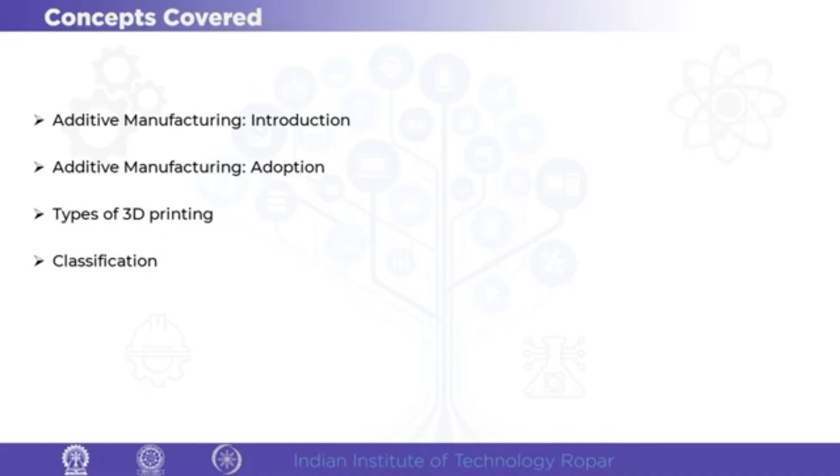Today we will be learning about additive manufacturing. Additive manufacturing is a new revolution in manufacturing, driven by cutting-edge technologies and breakthrough innovations. It is reimagining production processes, redefining sustainable manufacturing. Additive manufacturing is currently a market worth more than 2.2 billion worldwide.

There are a lot of machines currently being sold across the US and globally. In India also, a large number of machines are being sold by various companies. The data I have is from 2012. At that time, a lower cost machine sold for 35,000, and in the US especially, around 6,000 of the bigger machines were sold.

But now things have changed. Now with a 20.5% CAGR, the global additive manufacturing market is supposed to be worth 34,846 million by 2028.

So welcome to the world of additive manufacturing, which is transforming manufacturing processes in India and worldwide in a very big way. It is opening new pathways to economic, technical and logistic advantages in the manufacturing domain.

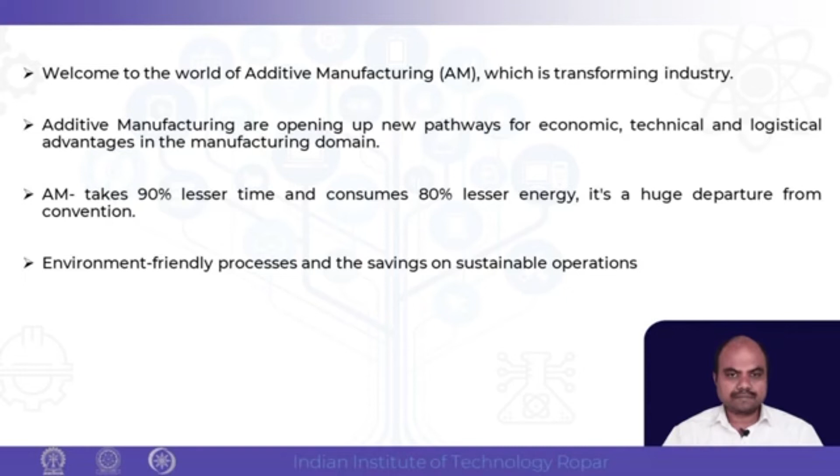While conventional subtractive manufacturing forms a 3D object by machining out material, additive manufacturing is popularly known as 3D printing. It makes layer by layer manufacturing and builds the product in minutes, and both smaller and bigger sized components can be made using additive manufacturing.

So very small, micro level printing is also possible, whereas even in civil systems, bigger projects using additive manufacturing are also possible.

So additive manufacturing, or rapid prototyping, or 3D printing, prints faster and significantly reduces time to market. Whenever you want to print something, you take it, make the CAD model, convert it to an STL file, and give it to the computer, which sends it to the 3D printing machine.

So the time from design to manufacturing is very less, and this speeds up the overall innovation. So for new technology, new products, if you design it, you don't have to wait a long time to realize it. Very fast, we can design and produce the part in less time.

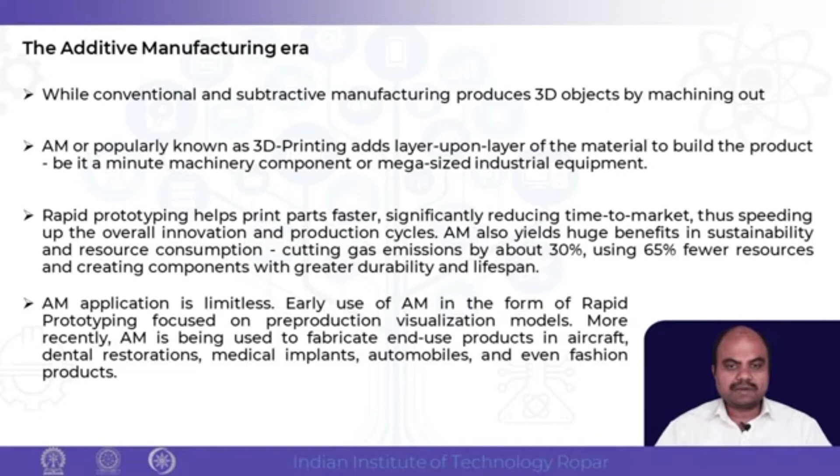So it's a huge benefit, and it's sustainable also - resource consumption is less, and carbon emissions are reduced. Applications are limitless. We can fabricate various models, and it has various applications in various industries.

Almost 34% of US manufacturers have already adopted additive manufacturing in their manufacturing plants and systems.

It is not required that we have to remove the traditional manufacturing process. Additive manufacturing process can replace some portions or some processes. However, it should actually be an addition to the manufacturing technologies and machines which a company already has, so the added advantage can be used for multiple applications.

So applications are diverse - from automobiles, energy, medicine, aerospace, so many applications. NASA has successfully used rocket injectors made this way, and in a Formula car, a 3D manufactured product has also been used. A wide range of materials can be covered, used for industrial and other applications.

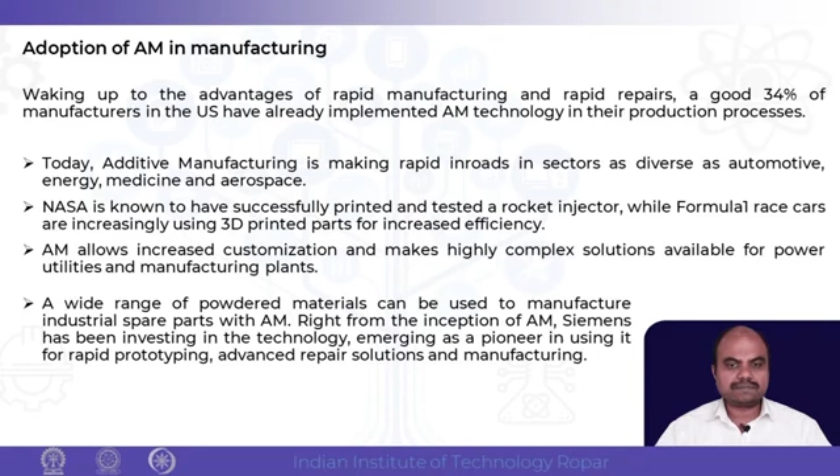So additive manufacturing is also known as 3D printing. It refers to a manufacturing process which creates 3D objects using multiple layers of material to form a component. There are various methods for additive manufacturing, and various materials can also be used like glass, plastic, ceramics, metals.

There are also other terms like 3D printing, rapid prototyping, direct digital manufacturing, layered manufacturing, and additive fabrication. All of them are similar kinds of terms used to depict the additive manufacturing setup processes.

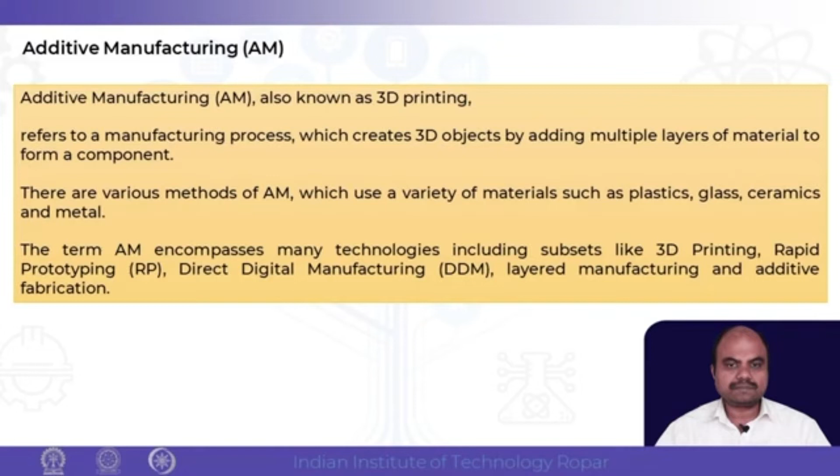As per standard, there are various additive manufacturing processes, but there are 7 major additive manufacturing processes which we are going to learn soon. The differences are in terms of building mechanisms, price point, materials, and usage. Some of them are quite different with respect to each other.

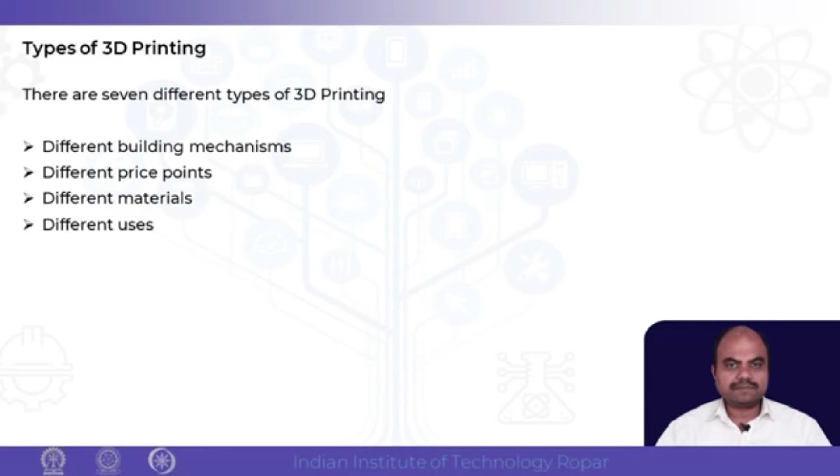So why is additive manufacturing used? It is used for prototyping, low volume manufacturing, and tooling. Tooling means previously, especially for plastic bottles or anything you want to make, dies were very expensive - you had to make 5-axis, 6-axis, 7-axis CNC milling machines to make a die, and it takes a lot of time also. Now, much of this tooling can be done with metal additive manufacturing process. Of course, post-processing is required, but that is much less time consuming compared to the total time required for manufacturing.

Consumer products can also be made. Customization is very much possible with additive manufacturing because previously we used to have one design made multiple times. Now with additive manufacturing, every time we print, you can customize it easily.

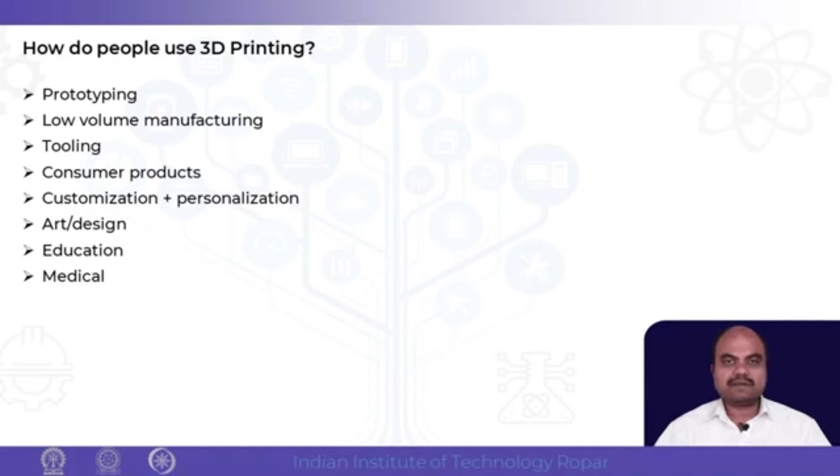Art production - AM can be used for art production also, and see how it looks. Design checking - you can make a prototype and check whether the design is okay or not, and the same prototype can also be analyzed. For education, AM is used. For medical, there are lots of applications, many places AM is used.

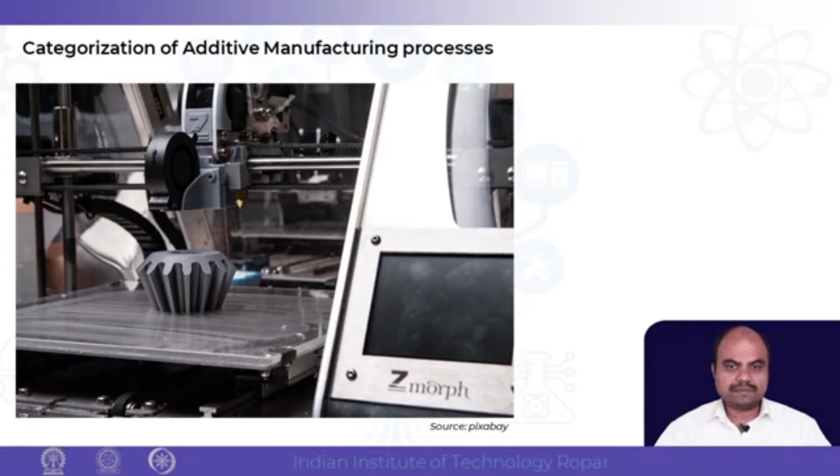Now, categorization of additive manufacturing process. Here you see one image of a metal additive manufacturing machine. As per ASTM F42, additive manufacturing is classified into 7 major categories. The difference among these is basically the material used, the deposition technique used in the machines, and the way the material is being fused or solidified.

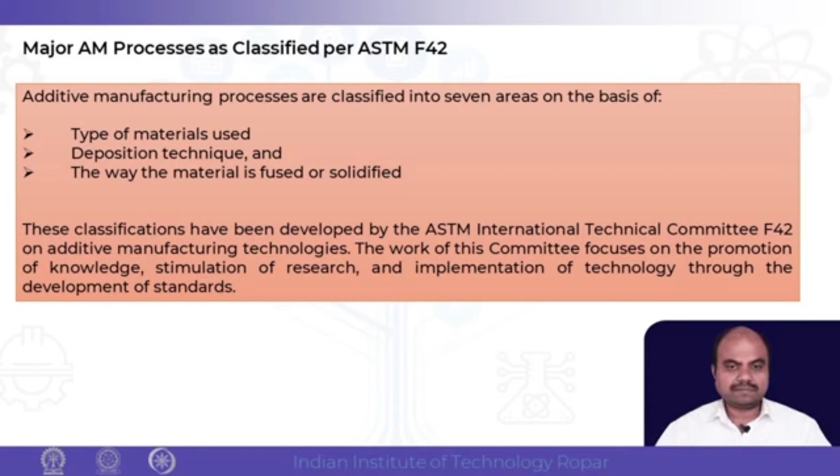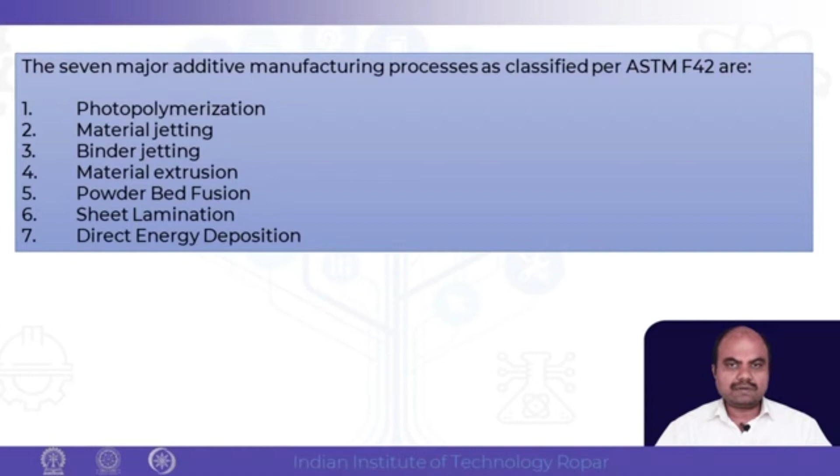So what are the 7 additive manufacturing processes according to ASTM F42? One is photopolymerization, second is material jetting, third is binder jetting, fourth is material extrusion, fifth is powder bed fusion, sixth is sheet lamination, seventh is direct energy deposition. Now we are going to learn more in depth - according to ASTM F42, there are 7 techniques, 7 processes basically.

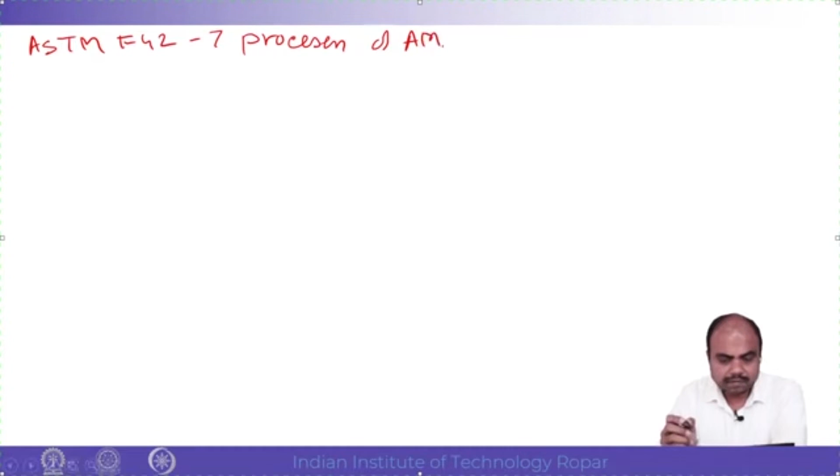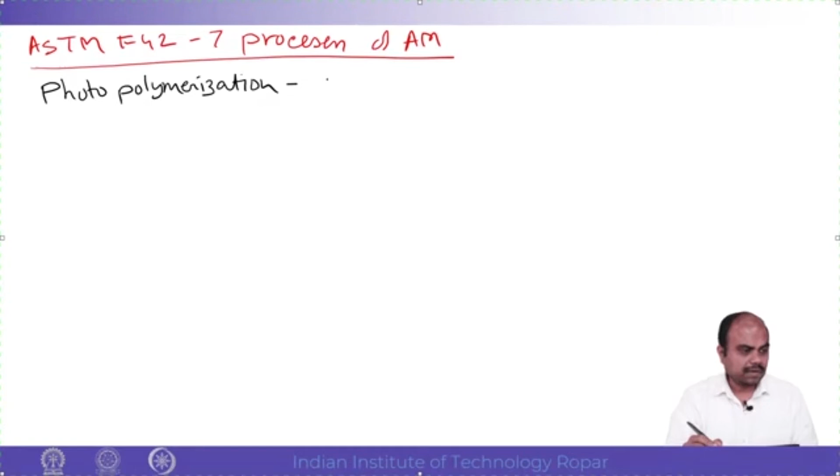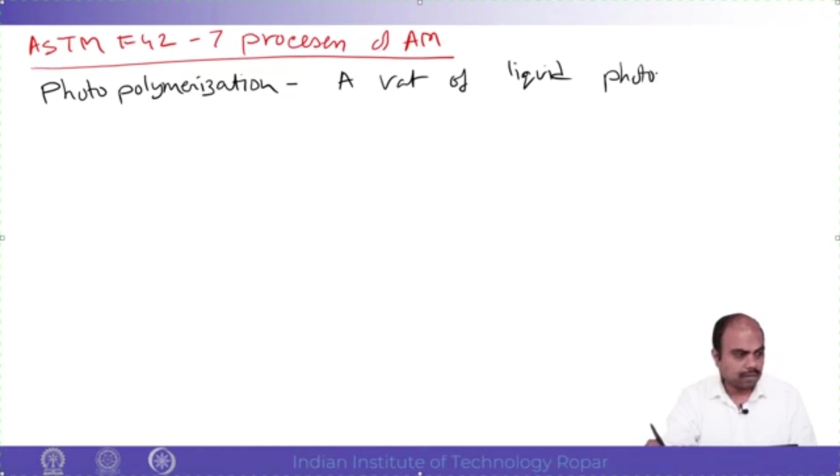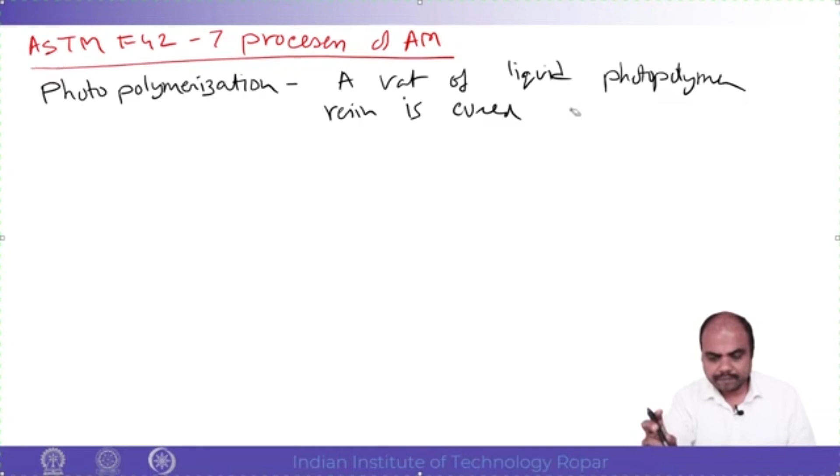Let me take a different color. One is photopolymerization. In this, basically a vat of liquid photopolymer resin is cured through selective exposure of light. Resin is cured selectively using light, laser, etc. The next one is material jetting.

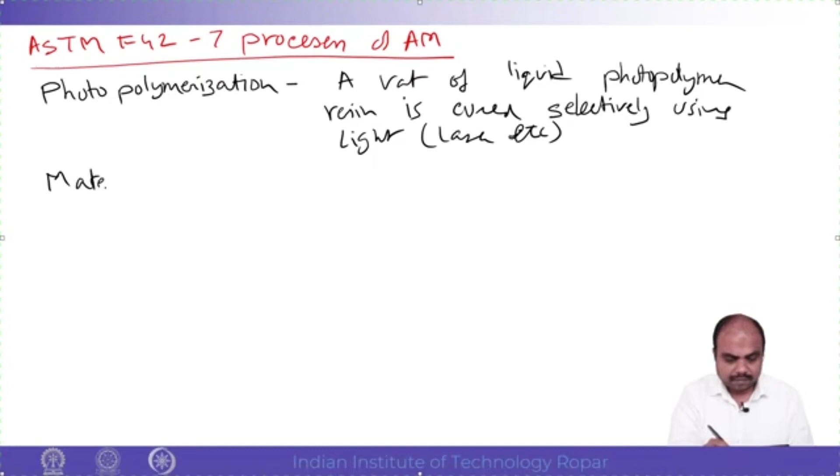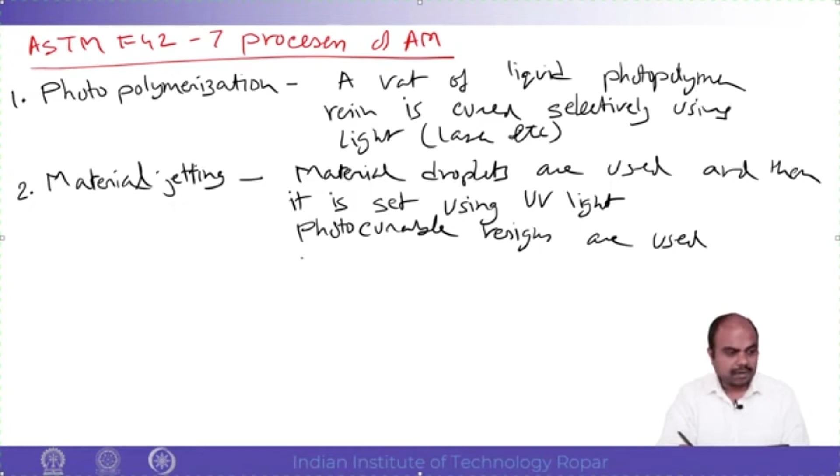Second one, material jetting - in this, material droplets are used, and then it is basically set using UV light. So here also photocurable resins are used. This was originally termed as 3D printing.

There are multiple names for this photopolymerization technique. Some of the names are stereolithography, SLA. It is also called digital light processing. These are very similar technologies, but they are not the same - they are a little different from each other. Then there's clip technology, that is continuous liquid interface production, which also falls under this system. Then scan, spin, and selective photo cure. These names exist because different companies are making technologies falling under the main photopolymerization technique, with different names and sometimes different technology. Like clip technology is much faster, a little less accurate, but very fast. So this falls under photopolymerization.

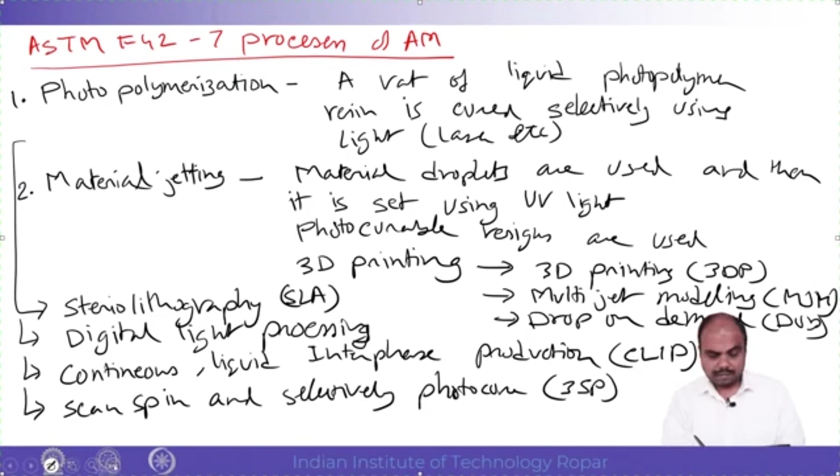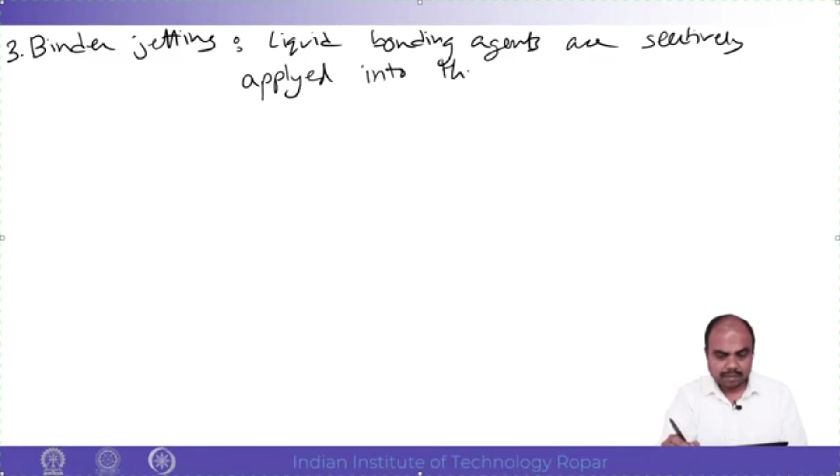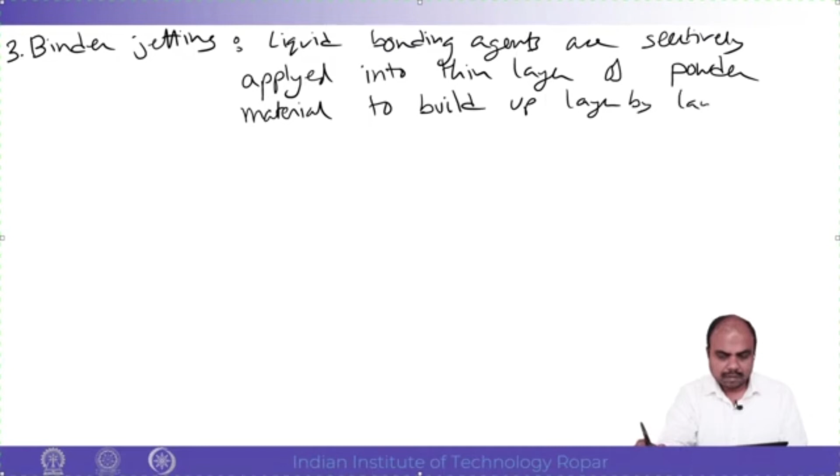Now we will go to the next technology, that is binder jetting - third one. In this, the technology is that liquid bonding agents are selectively applied on thin layers of powder material to build up layer by layer manufacturing. Here electricity is not used because it's not required.

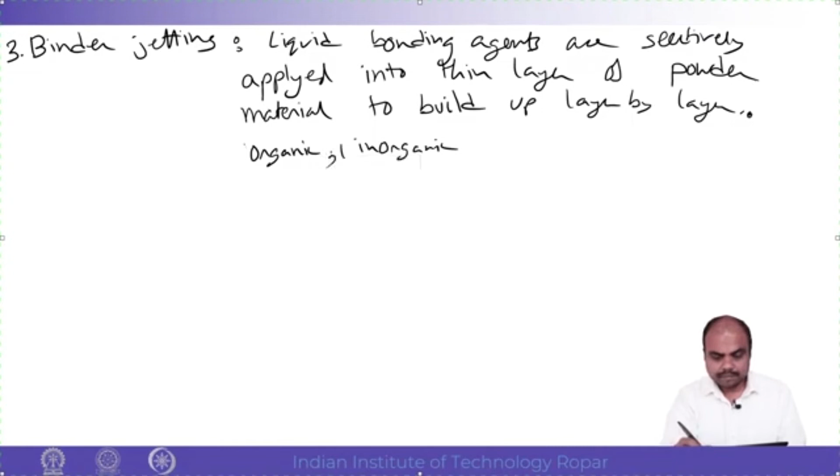In this one, materials can be organic, inorganic, it could be metal also - metal, ceramics, etc. The other names for this are drop on powder, DOP, and powder based printing.

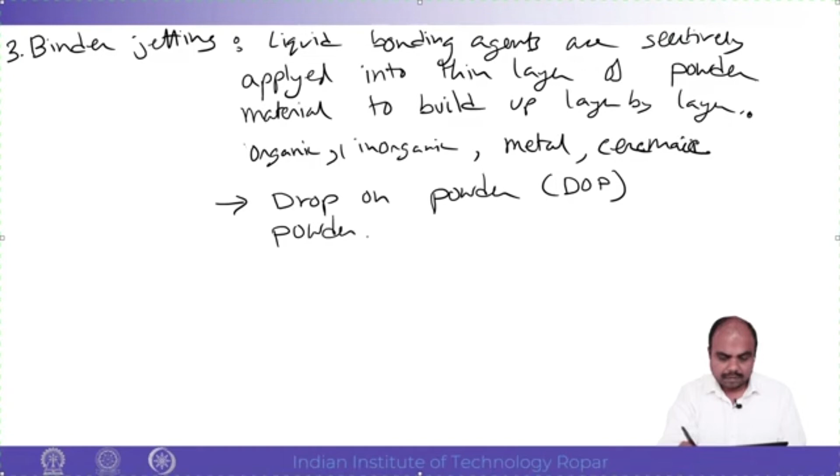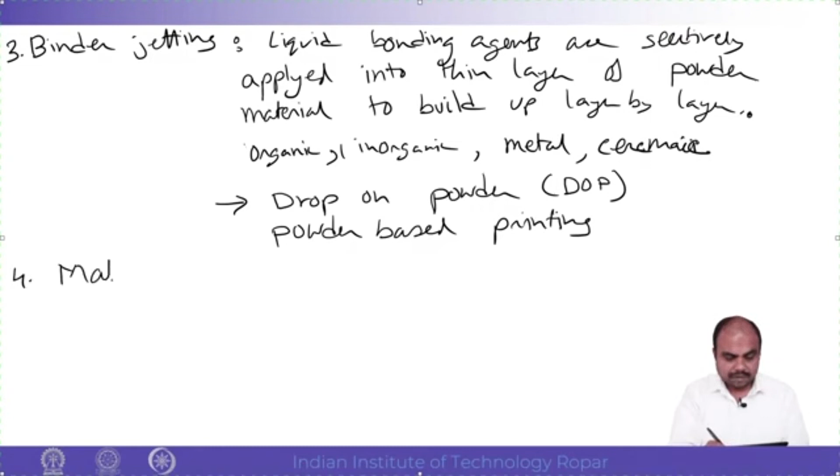The next one coming is material extrusion. In this, the material is extruded through a nozzle and it is made into multiple layers. Engineering thermoplastics are used.

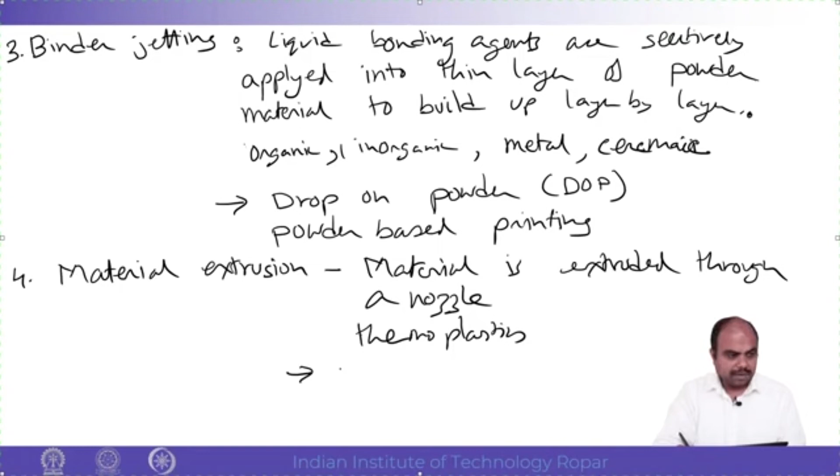This is one of the most widely used techniques, and FDM is one of the machines - various companies have made this machine and are selling it in the market at a very cheap price. The technologies coming under this are fused deposition modeling, FDM, and fused filament fabrication.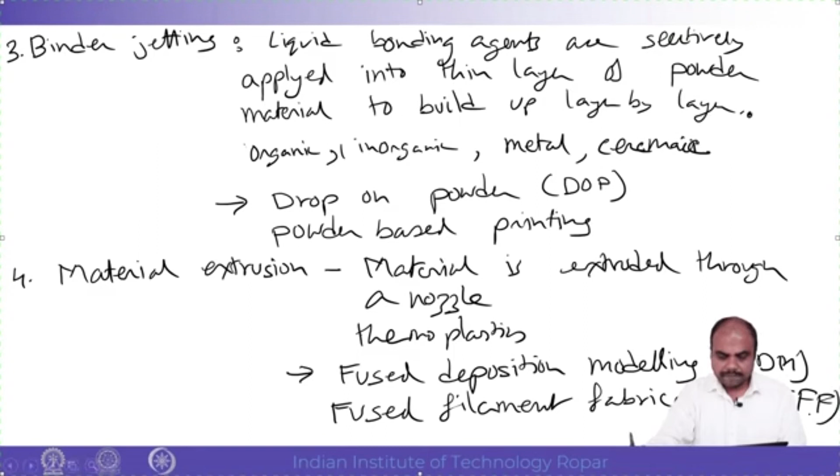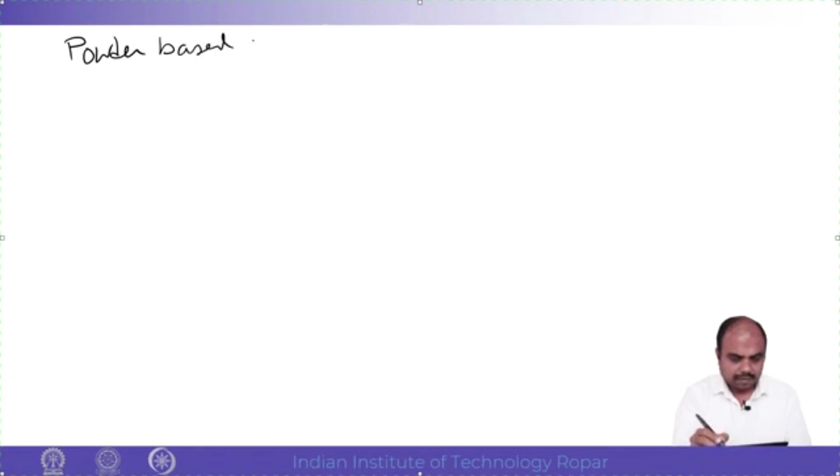The next one is powder based fusion - fifth one. In this, the technology is that powder material is selectively consolidated and melted together using a heat source such as laser.

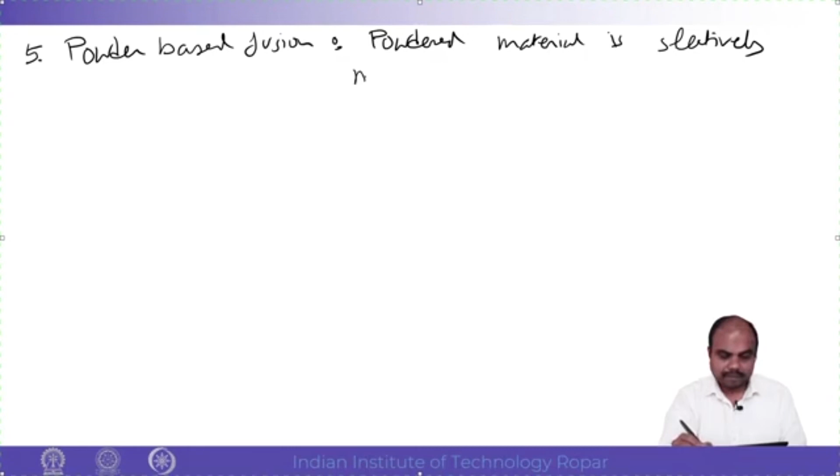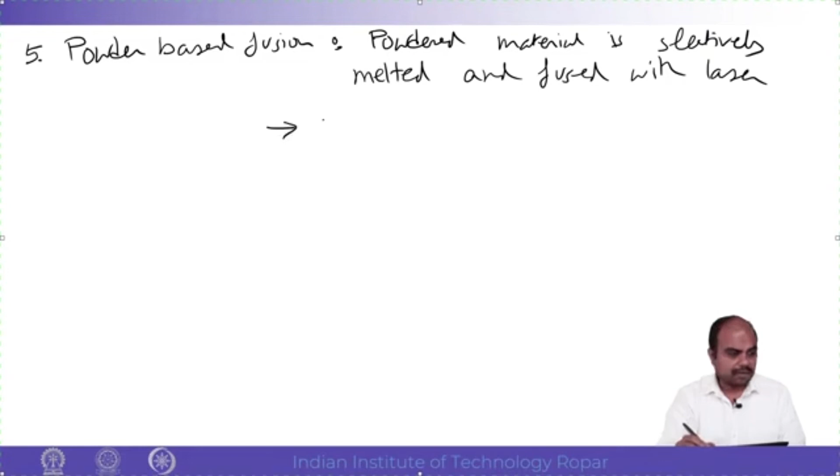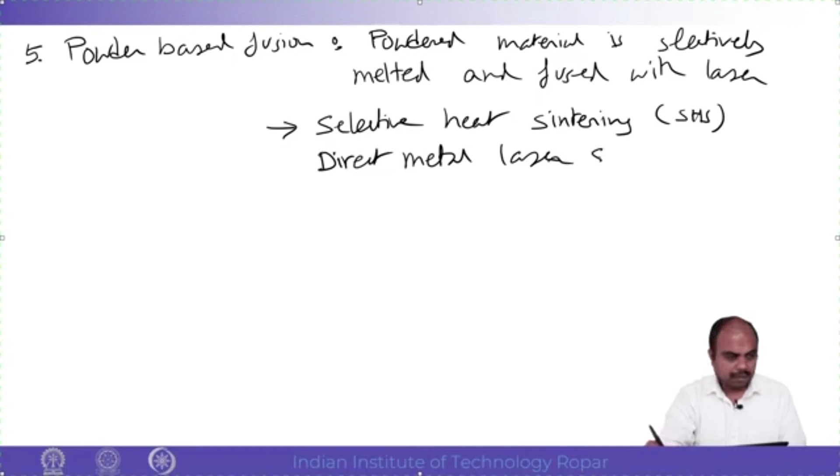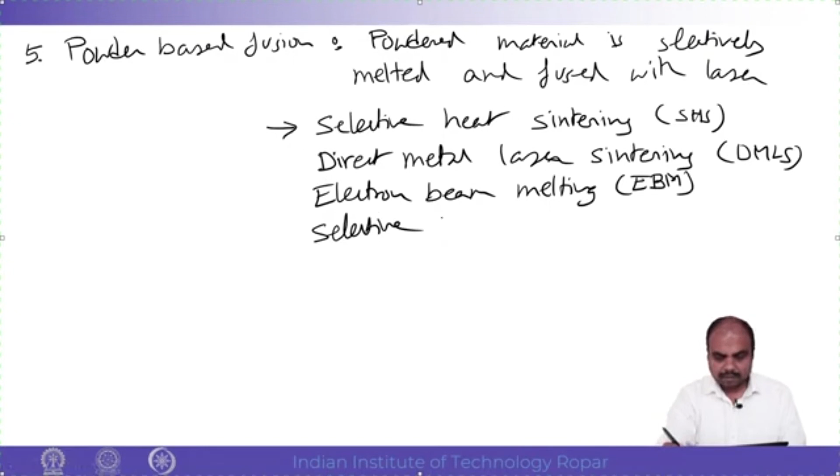This is a widely used technique, especially for metal. The technologies coming under this one are selective heat sintering, direct metal laser sintering, electron beam melting, selective laser melting (SLM), and selective laser sintering - this is one of the widely popular names which many of you may have heard about.

Sixth one is about sheet lamination. In this technique, sheets of materials are stacked and laminated together to form the object. The method for sticking or making the object could be adhesive, ultrasonic welding, or even brazing.

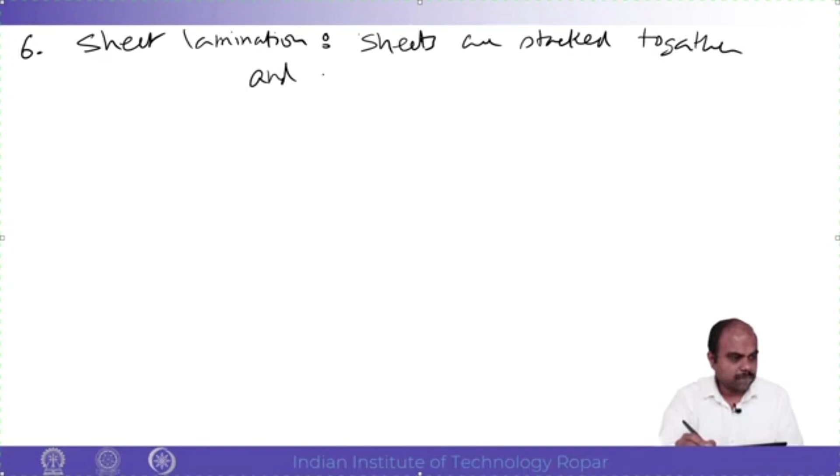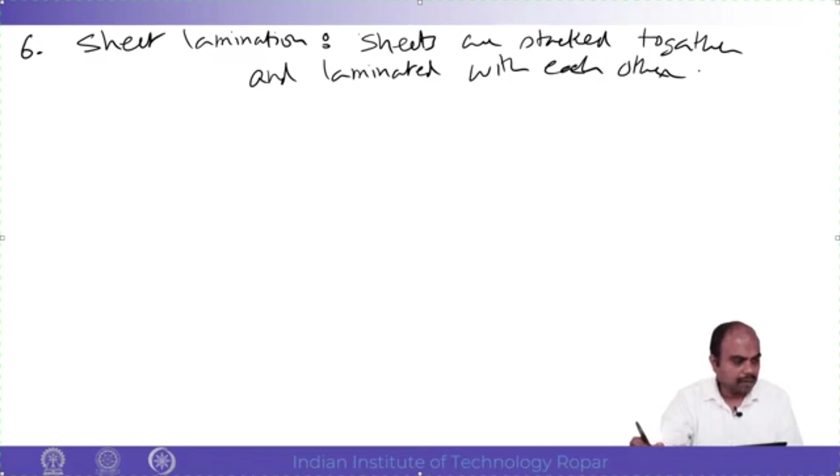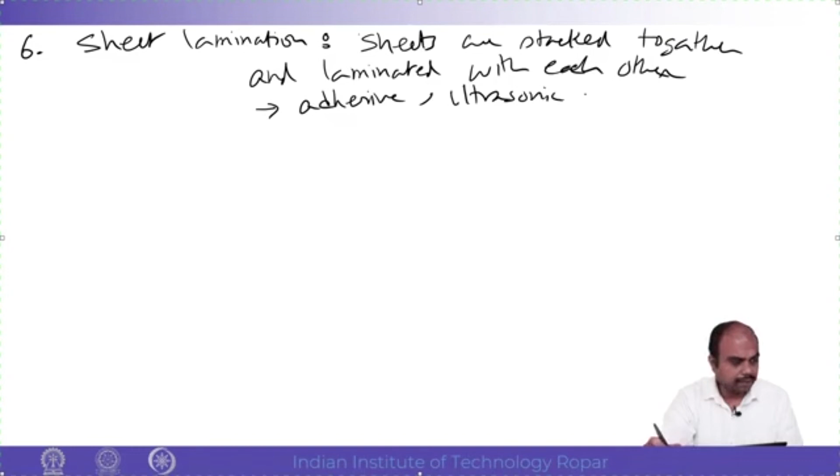This could be using adhesive, it could be used ultrasonic, or brazing.

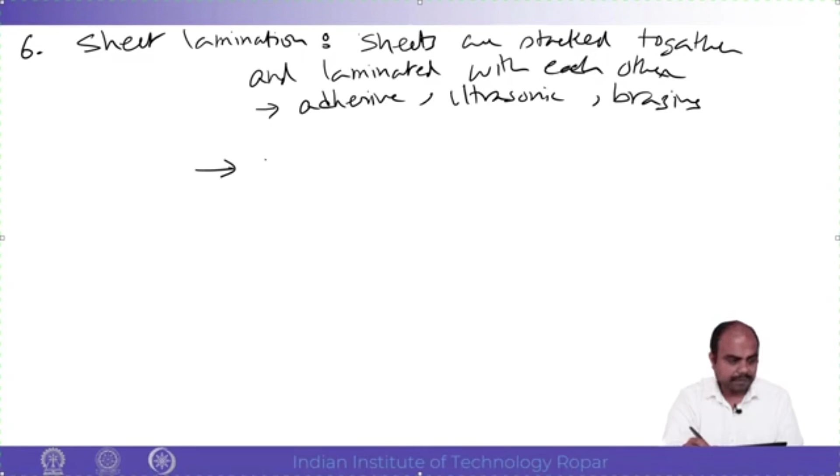So the technologies under this are selective deposition lamination, that is SDL. Laminated object manufacturing, many of you would have heard, one of the popular methods. And ultrasonic additive manufacturing.

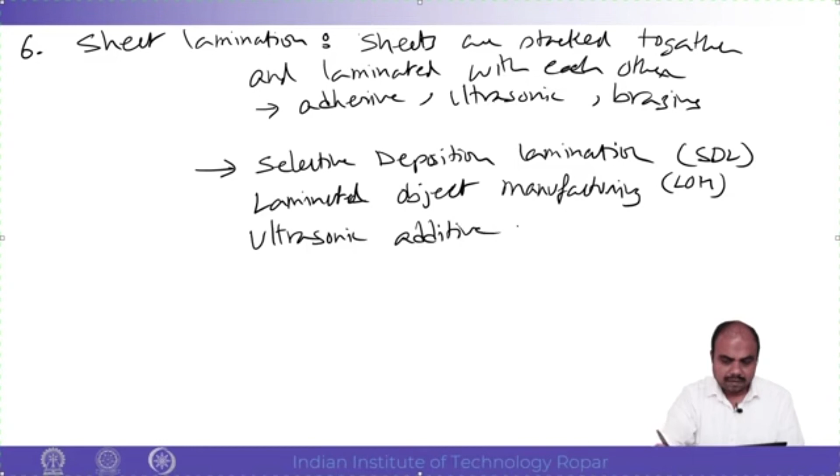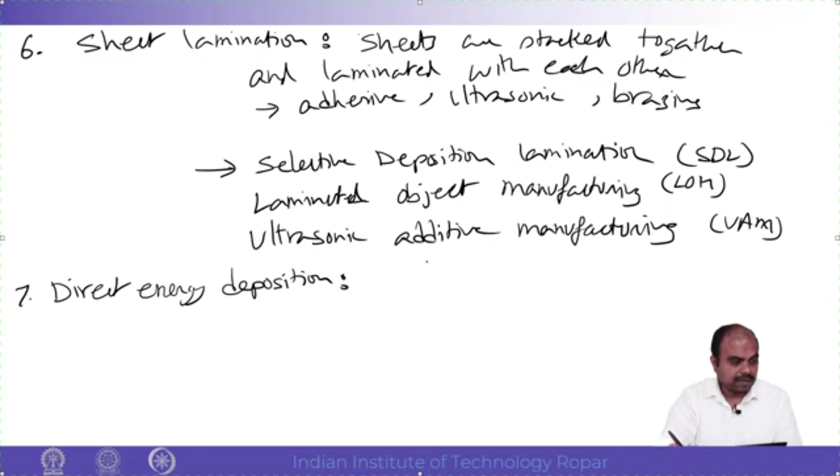The last one we are discussing is direct energy deposition. In this, basically powder metal or wire is fed into the melt pool, which then generates a surface, made into liquid format almost, and then the laser or electron beam is used. So the metal powder or wire is fed into a melt pool, and we are using laser or electron beam.

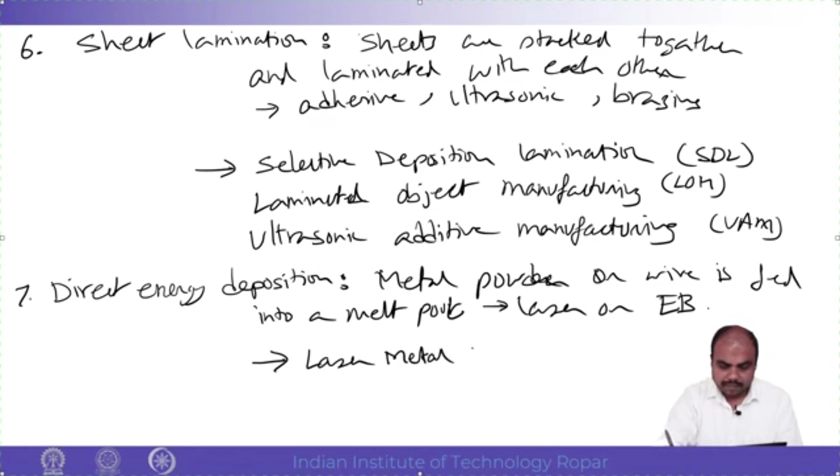Technologies under this one are laser metal deposition, electron beam free form fabrication, direct metal deposition, and laser engineered net shape.

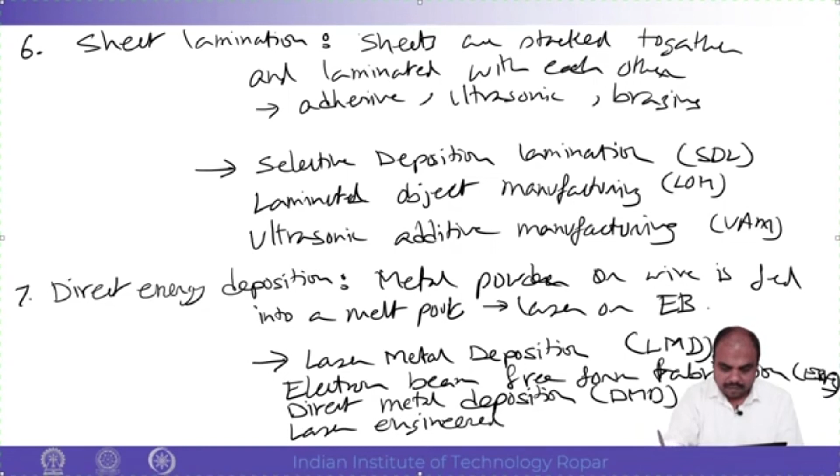So now we have seen all these 7 techniques and what are the other names which are followed for this technique. Now we will see how the categorization can be done.

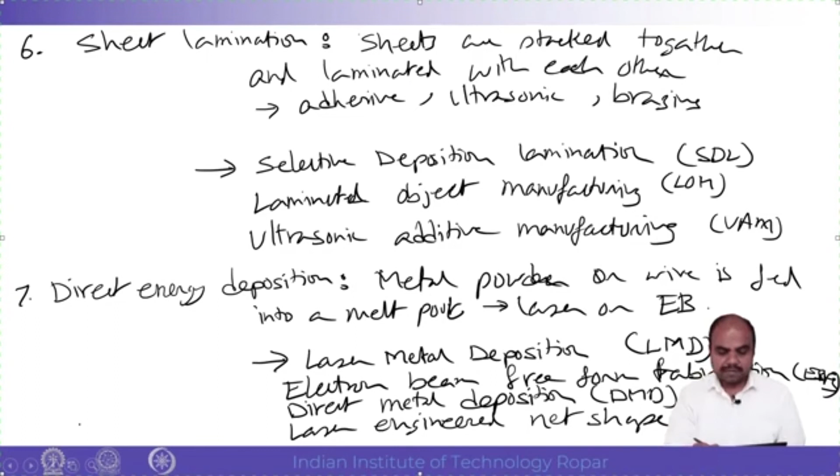So additive manufacturing process, it could be either liquid based, solid based, or powder based, right?

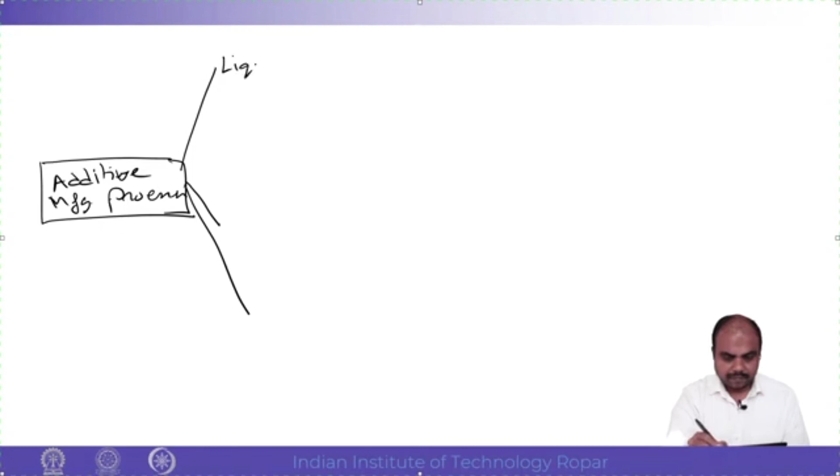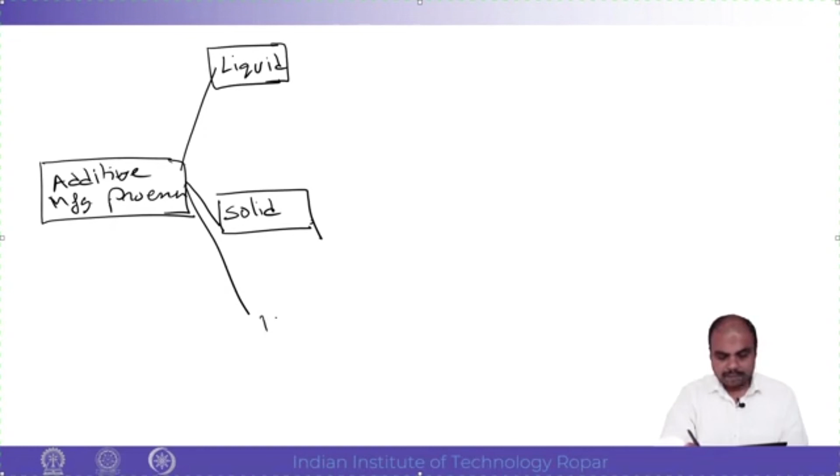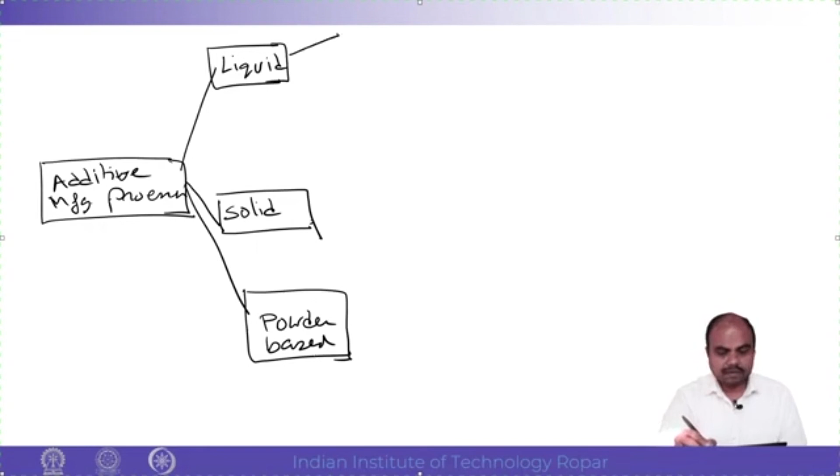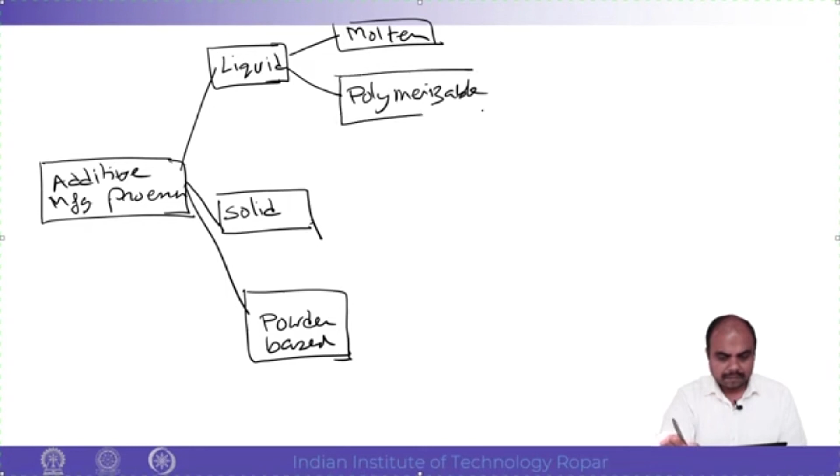So under liquid phase, it could be one is molten, and next possibility is polymerizable. If it is molten, it could be material extrusion. If it is polymerizable, one option is vat photopolymerization. Second possibility is material jetting.

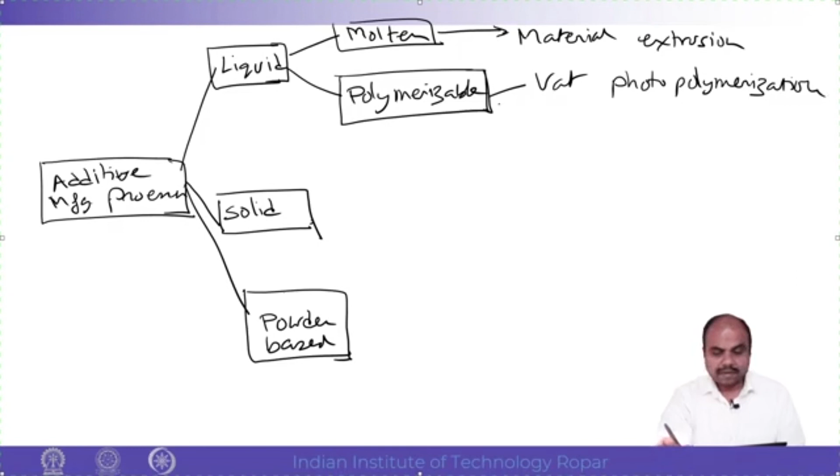If it is solid, then of course bonded objects. And as we have already learned, solid means sheet lamination.

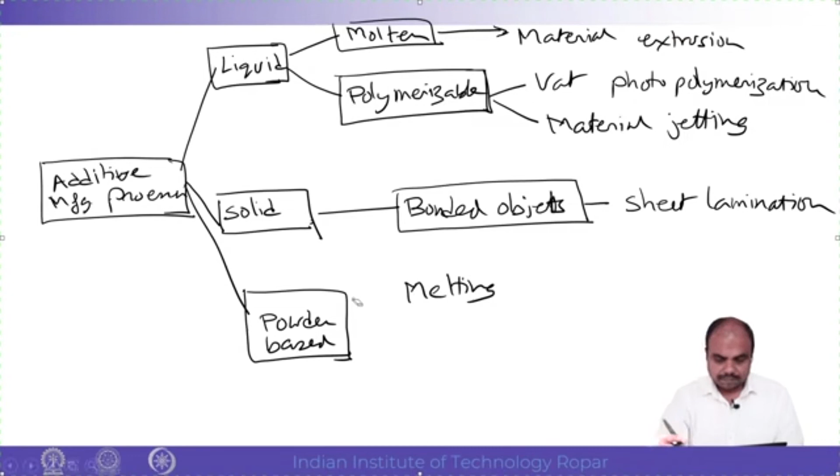Now powder based, it could be one is melting. If it is melting, one could be powder bed fusion. The next possibility is direct energy deposition.

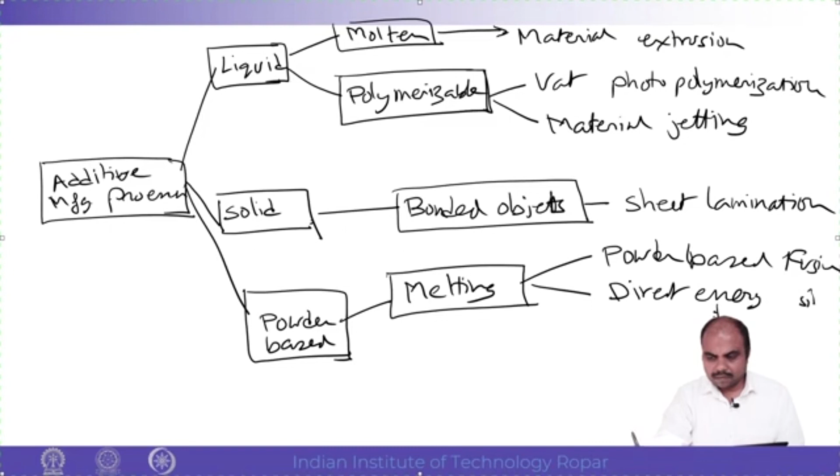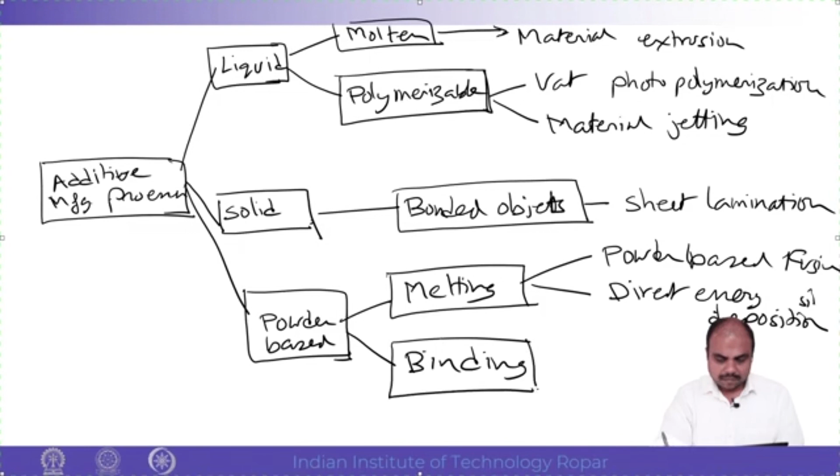Or it could be binding also. If it is binding, then binder jetting. So now we have seen the 7 technologies, how this can be categorized with respect to each other.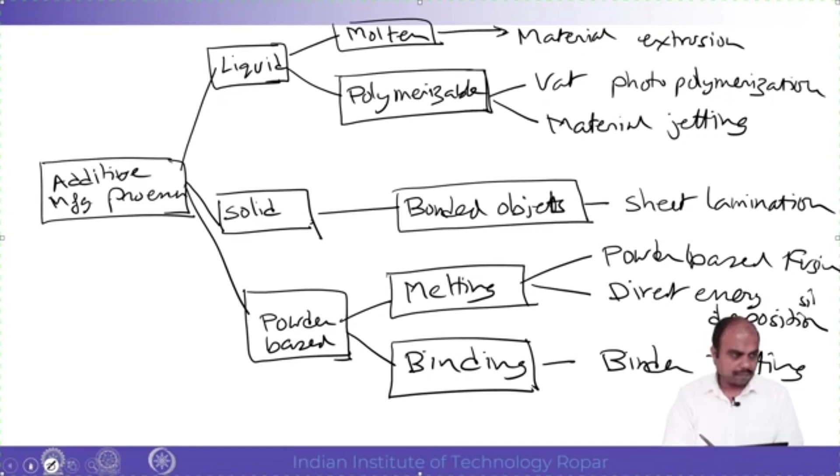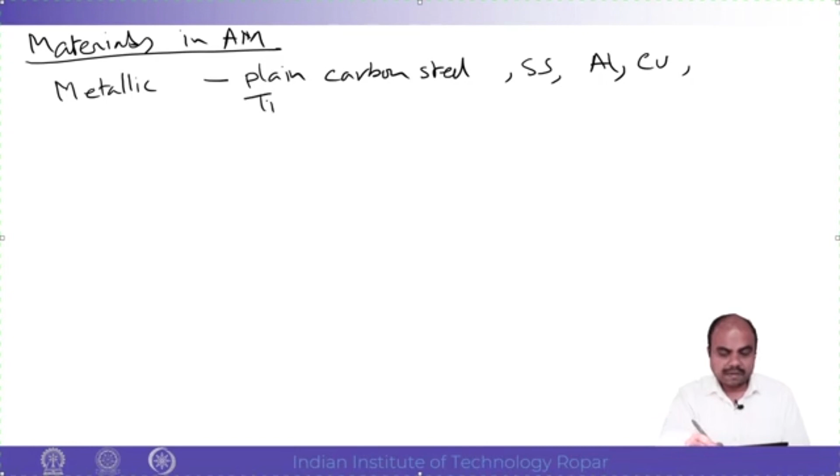As far as materials are concerned, there are so many materials possible to use in additive manufacturing. Some of the materials are metallic materials, that is we can use plain carbon steel, stainless steel, aluminum, copper, titanium, bronze, nickel, and various others.

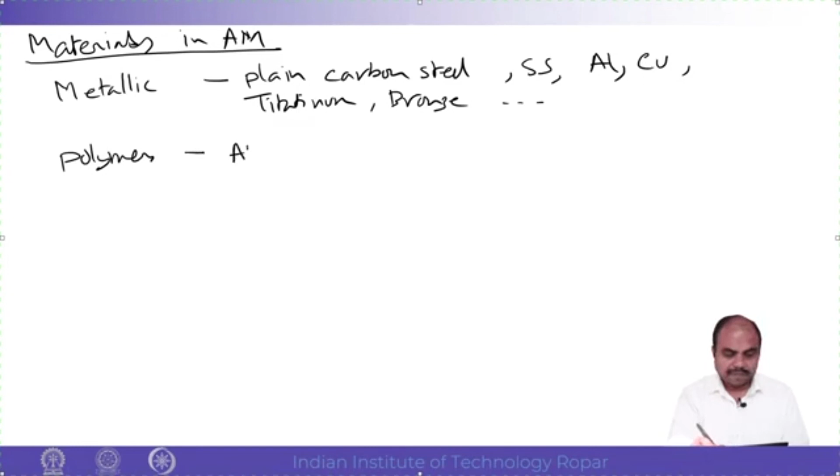For polymers, that is plastics, we can use ABS, acrylonitrile butadiene, nylon, polycarbonate, polypropylene, epoxides, glass-filled polyamide, Windform, polyester, polystyrene. So many other materials can be used.

There are also others which don't come under this. We can use sand, ceramics, tungsten, wax, starch, plaster, similarly. So many materials we can use.

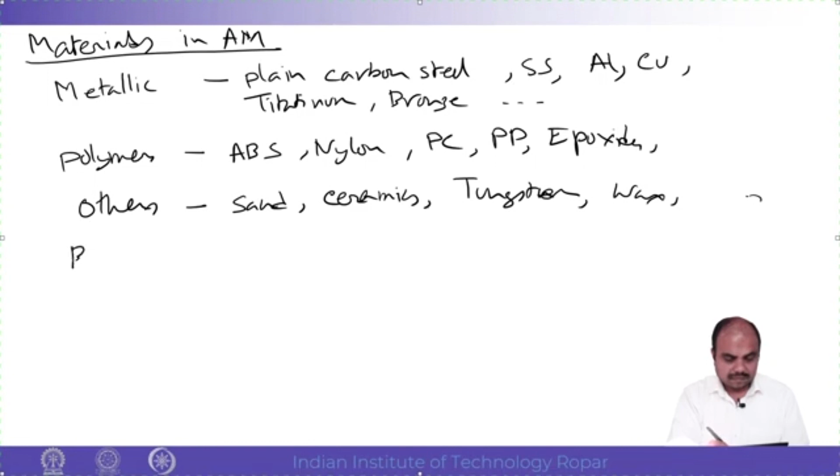Biocompatible materials. There are various biocompatible materials which can be used. Some of the names I'll write: PCL, and there are several others also.

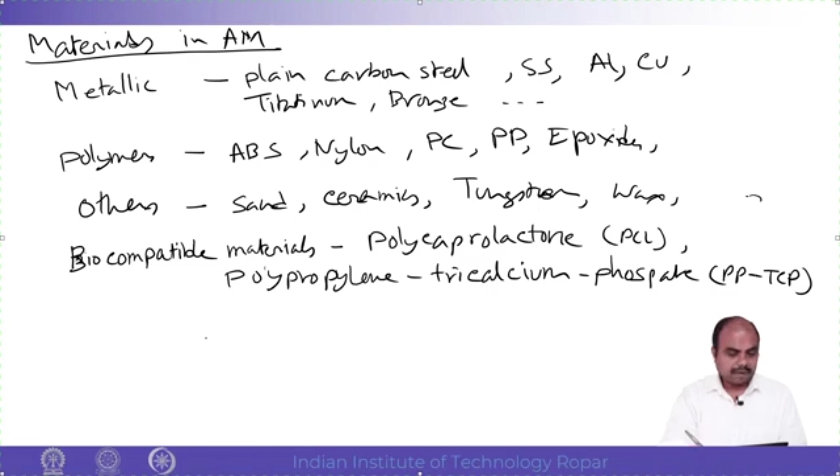So now we have to learn a little bit of the generic way of additive manufacturing. First is create CAD model. The next is to convert the CAD model into STL file.

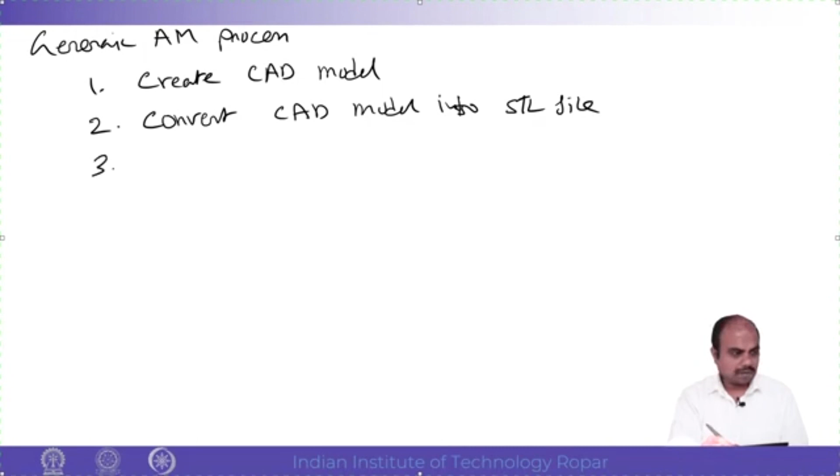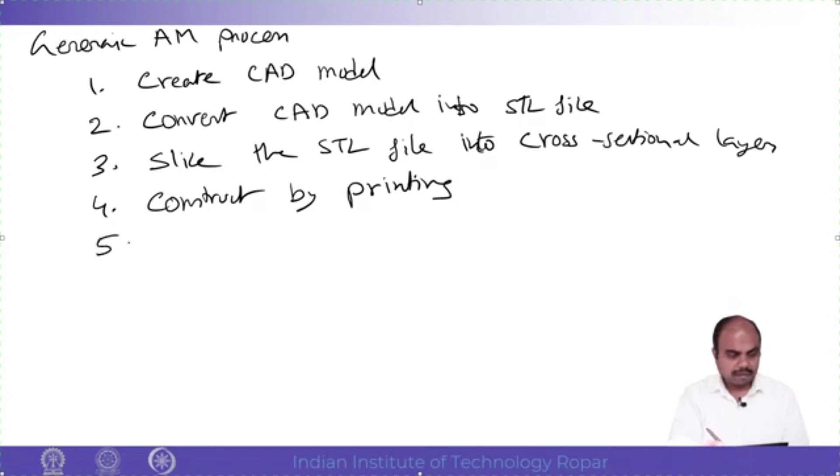Third one is slice the STL file into cross sections. Then construct the model by printing using a machine, and fifth one, clean and finish, post processing if required.

So to explain a little bit, first you make a CAD model using any CAD software and then convert into .stl file, that is stereolithography file. It is also standard tessellation language, and .stl file is basically in computer CAD, and this .stl file can be used to print a 3D object using the machine.

And then this slicing - so if this is the object, it has to be sliced, and this slicing is generally done by the software already given by the manufacturer of this machine. There are various reasons for it, like how the quality of the product, accuracy and all these things depend upon this. So how many cross sections you need depends upon some factors related to this machine.

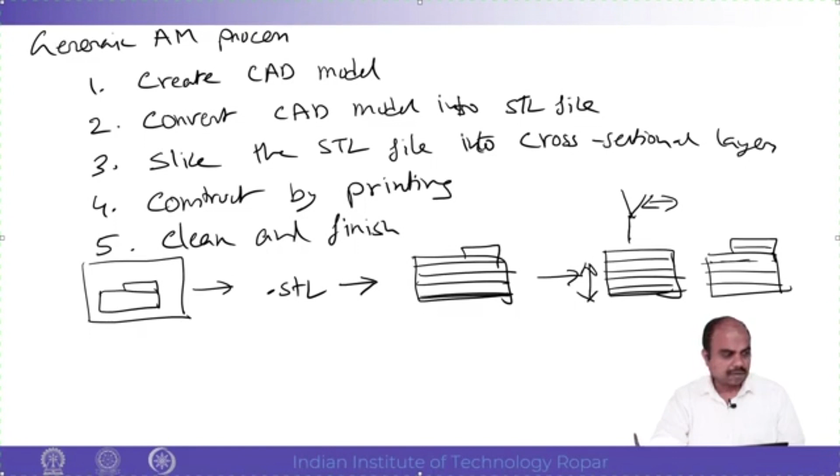So then the machine will actually go to print, and then layer by layer the machine is going to print the product. After that, once printing is done, maybe post processing is required because some marks will be there on the surface, the quality has to be improved, and these things are required for this. Thank you.